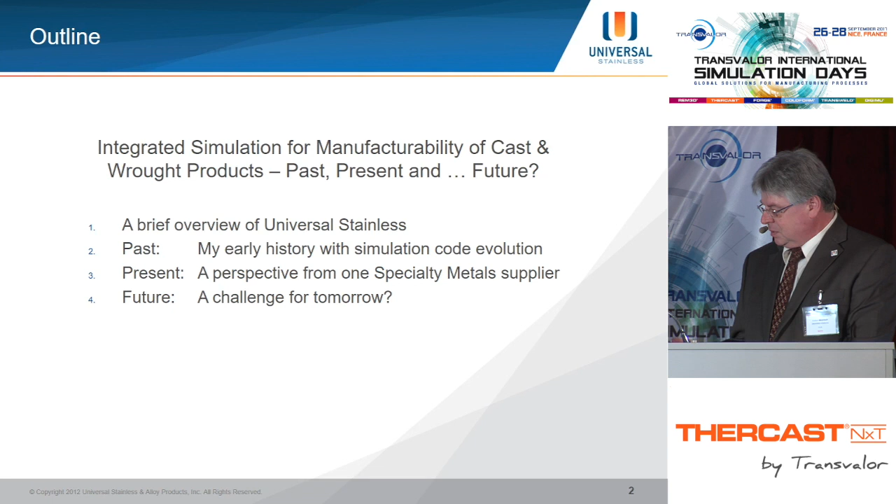So after a brief overview of Universal Stainless, I'd like to give a fairly personal view of the past, present, and possible future of integrated simulation for cast and wrought products. Universal Stainless is based in the northeast of the USA. It's headquartered in Bridgeville, which is just south of Pittsburgh. We have plants in New York, Pennsylvania, and Ohio.

Our main market is aerospace, but we also have other major markets where materials are critical. And in the bottom, you can see the range of the products we make. Largely semi-finished or finished products, ranging from ingot all the way through to bar, billet, wire, and shape products.

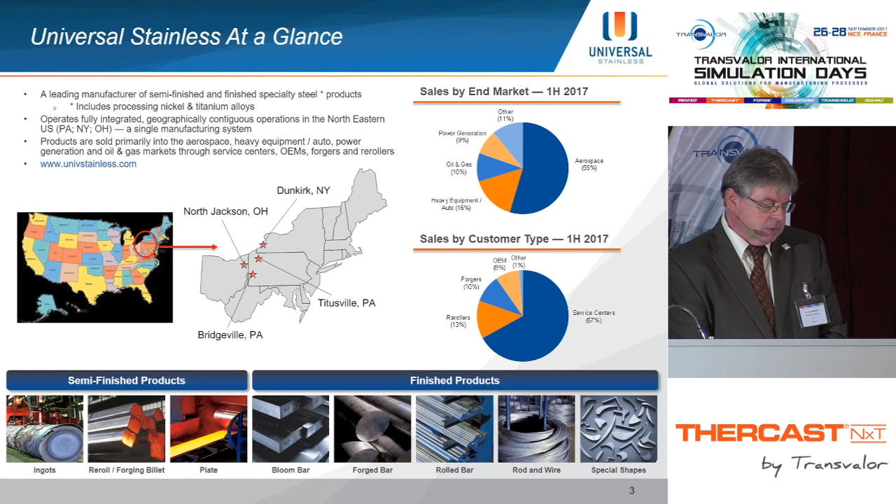Looking at the processes, we have a range of melting activities from AOD, argon oxygen decarburization, 50-ton melts, through to 12-ton vacuum induction melts. Much of our material is then remelted through a vacuum arc remelt process or electroslag remelt process. And then we have a variety of hot working options. Our Ohio plant has the first radial forge in America. It's a brand new facility, 2011, with state-of-the-art equipment.

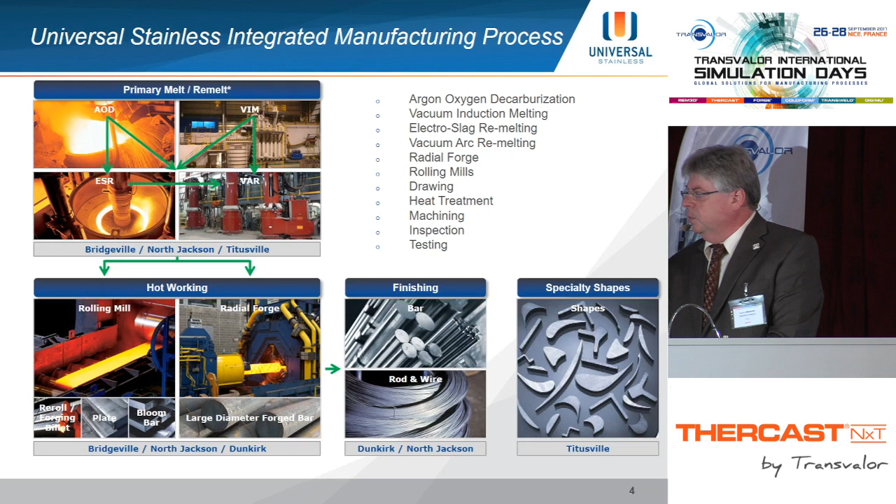So looking at the past of my modeling experience, it goes back to even before Forge 2, when our company at that point had an R&D group in the States, in Houston, which carried out simulations with a code known as ALPID. This is a precursor code to what is now known as Deform, so a pre-commercial version of it. And my company was involved in a collaboration to develop that. Moved on to purchasing Forge 2 and working very closely with Transvalor.

Then I changed companies and moved to the States in 2001, where we started looking at codes for ring rolling development. And at that point, there was a manufacturing technology program sponsored by the US government, which was a 2.5D non-thermally coupled approach. And that was created that way because of perceived constraints on the capabilities of code and what could be developed. That funding was lost in 9/11. And I started working with Transvalor again, and we developed a very successful implementation, I think the first industrial ring rolling code in the world.

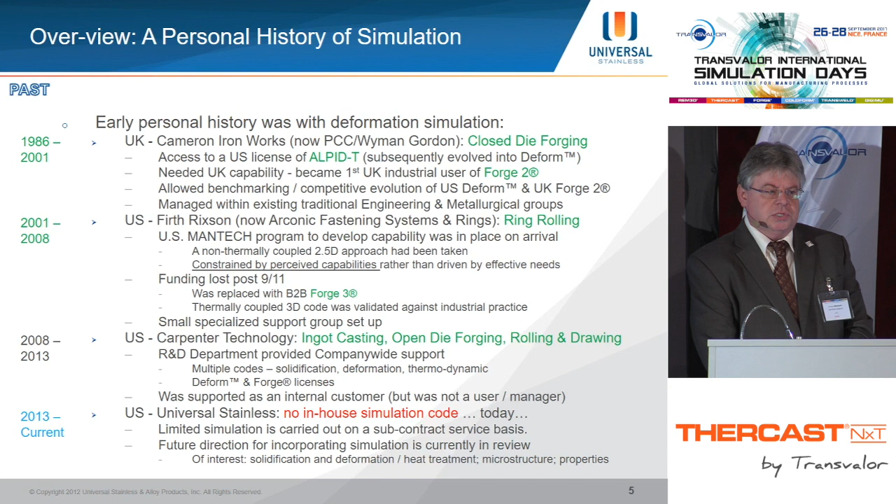2008, I moved on to another company which already had a variety of codes, both Forge 3, Forge 2, Deform. So a lot of code availability, including melting codes, which was my first introduction to them. So in 2013, I moved to Universal Stainless, and we have nothing. But I'm there to help grow this company, and I'm aware of the importance of modeling. And what I'm looking at is developing a strategy for implementing an integrated process chain for all our products and for all our processes.

A very quick focus on the very early days of modeling back in the late 80s. So ALPID I've already mentioned we were using. Those simulations would take weeks, and to get a design iteration would take months. So very, very unique activities were used there, very painful. Very specialized expertise in those days. There was no automatic remeshing, so the whole skill base was quite different.

State of the art back in the late 80s was physical simulation, plasticine. It was quick, metallurgists could use it, we could make dies and modifications very easily. So when I was given modeling as a project in my first job, I basically stood up and said, that's not the future of where modeling needs to be, it needs to be digital. And it's very expensive and it's very slow, but it will improve.

The other big change I made was for a European company, but really a US company in Europe, in Scotland, was not to take the American solution. And the reason I did that was because of adaptive remeshing, which had been implemented. So that was an innovative game changer. And the ALPID development was saying it cannot be done. I said it can be done, it's happening in Europe. So we did that approach.

And the point I'd like to make here is in a few years, we transformed design of forging manufacture. And the big thing was the increase in computational speed, partly from the adaptive remeshing, also improvements in efficiencies and improvements in the computational power.

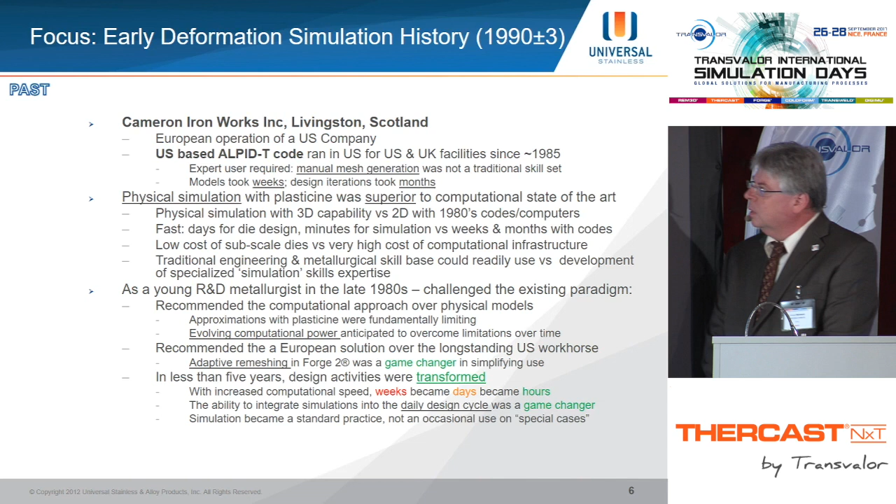Staying on the present, I could argue that engineering materials is very easy. We've been doing it for a long time. I can argue that we can do process development very easily. And a lot of tools are being developed to do both of these things. It's very exciting things for materials design happening just now from ICME.

But I argue that effectively simulating manufacturing processes is really difficult. Too many boundary conditions, too many assumptions, too many unknowns. And as we've heard already this week, computational power remains an issue. So we make approximations.

A perspective I'd like to emphasize here is we can design all we want for good materials, but it's when a material fails that's important. And if we're not designing for the failure mode, for the defects, we're not doing ourselves a service for this industry. So an example of that would be a coarse grain, excuse me.

Coarse grain and a fine grain matrix, or particles in a matrix. They come from the melting process. They come from solid state reactions after the melting process. So what happens upstream in the process is extremely important for the failure mode downstream.

And I think to model that, to simulate that, we have to do the individual process, but we have to do the process chains from beginning to end, because the output of one process is the input to the next. Otherwise, we're back to making assumptions and approximations.

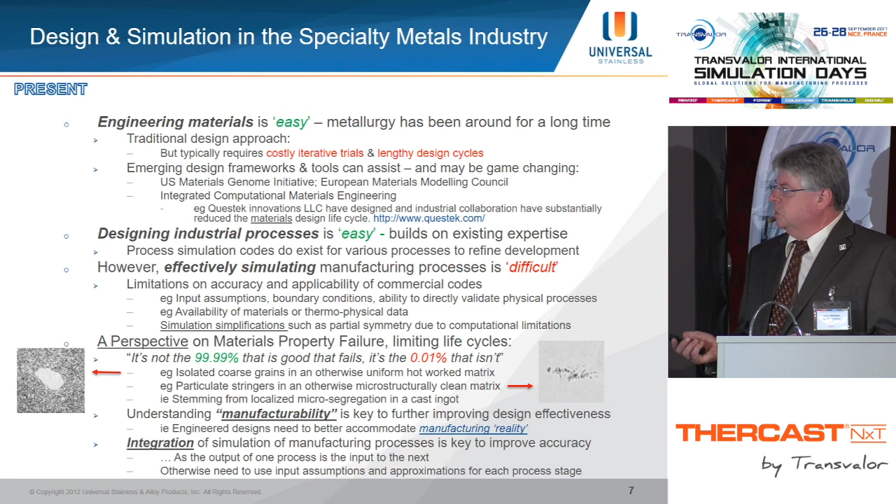So with regard to where we are, I'm doing a technology landscape for my company as to where we want to go, and looking at what's available. And for solidification modeling, there's some very stable codes out there, very mature. But for remelting, for vacuum arc remelting, electroslag remelting, it's very immature. There's not much out there. And it's essentially almost all 2D, and certainly the commercial solutions appear to be 2D. A lot of approximations come along with that.

Thermal homogenization is very important as an industrial step, where we reduce the microsegregation from a cast ingot prior to hot working it. And I think that tends not to be looked at in terms of a modeling technique. I think the tools are available, but not many people are necessarily doing it. And then obviously hot working heat treatment is extremely mature over the years.

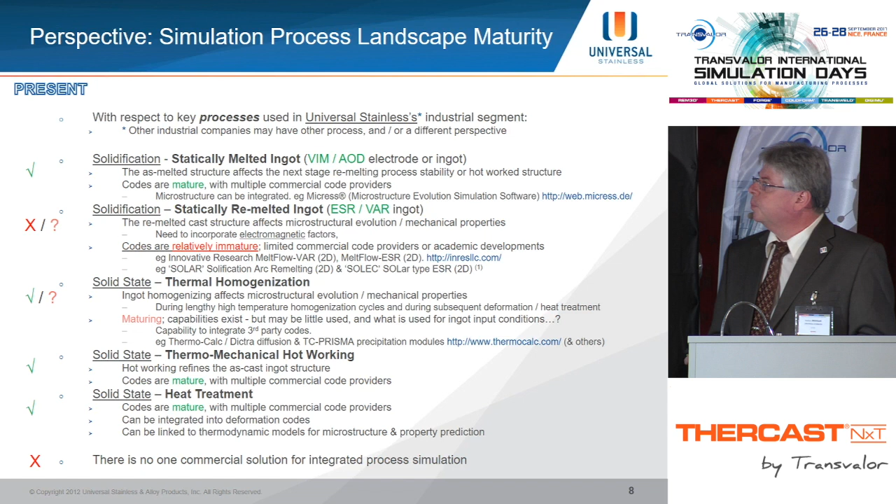So focusing on remelting and remelting simulations, 2D commercial solutions are available, but they're extremely limited, I would suggest. They don't mimic the real nature of the environment, which is a very, very aggressive dynamic environment, melting metal.

So the challenges for 3D is understanding what's going on in that dynamic environment, and also computational limitations. 3D is a problem for many of us. Any solution has to look at the transient states at the beginning and end of the process, as well as the steady states in the middle.

So there have been a lot of progressive developments over the years. As you've seen from my career, I've been in and out of modeling in various areas, but not really looking at remelting for some time. But I'm beginning to look at that again. And it's encouraging to see that there's been ongoing development.

So if we don't know what's happening, we don't know what's happening on the local solidification that gives the local microstructure that ultimately gives us the final properties that we're looking for and the defects. So by being able to measure something, we can then analyze it, we can then improve it. And I think that technology will help us understand how to develop and correlate and validate remelting codes. So this I see as a game-changing technology, which is just emerging.

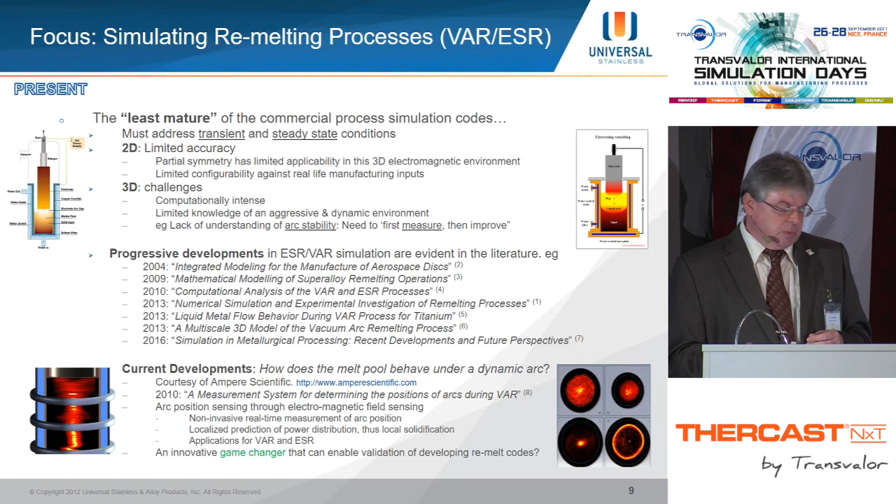Very briefly, does anyone apart from myself really care about remelting? It's encouraging to hear some focus on it in the presentations this week. But 20% of the specialty steel market by dollar value is in remelted products. The work that's been done over the years, and I did some early work in the late 90s trying to integrate across the supply chain, shows there's a level of importance. So this is important to the industry. We don't have it because it's a difficult challenge.

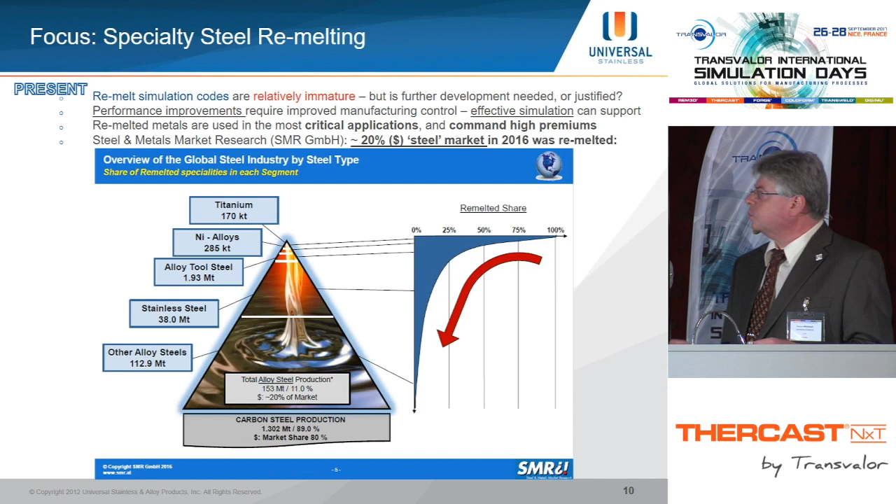So looking at the integration factor, it's very inefficient for industry to have multiple codes, multiple potential hardware solutions, multiple licenses, multiple training programs. What we'd really like is one solution. And I think I've mentioned that remelting is a major weakness here from a process itself. But in terms of integration, getting data transfer between multiple codes, I think there are losses of efficiency. And moving from 2D to 3D to 2D brings a lot of inefficiency. So it's not really what industry is looking for.

And if we want to get to the level of fidelity that will give us defect prediction, we've got to go beyond that. It is encouraging that there's a number of activities where completely independent code providers are providing some level of integration. And looking at what's happening with JMatPro and Transvalor and other codes, there's a lot of integration going on. So I think things are coming to a point where we can contemplate getting a single solution if we have one company which can develop for all the processes. But today that does not exist.

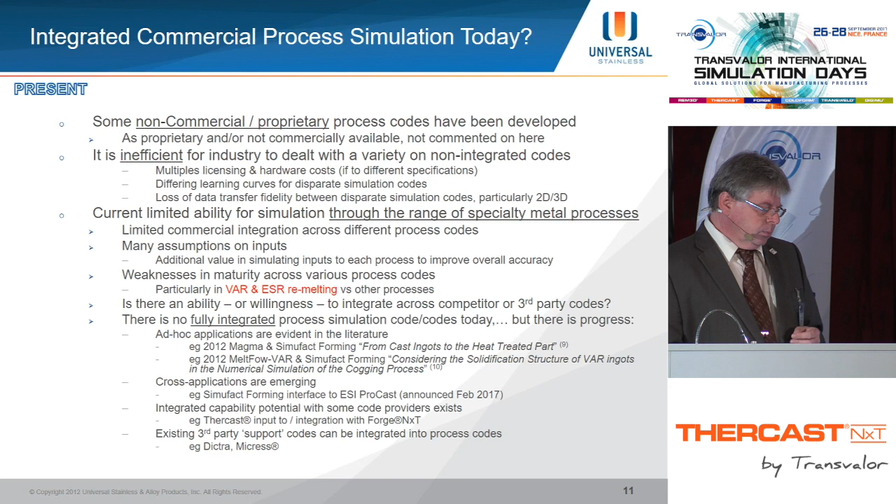So for the future, computational issues, we've heard them in the presentations yesterday, we all face them. For me, they lead to a lot of approximations that just limit the value of a simulation. They're also very expensive. And there's approaches that can be used with academia, there's approaches that can be used with industry, and industry typically is not going to have the very expensive approaches for hardware. So supercomputers, to use that term, may be put into national labs and maybe put into large universities, but it's very unlikely that industry will have access to that sort of technology, at least for the foreseeable future.

So I wonder whether advances in computing that we really have no background in will come, such as quantum computing. Is that really a game changer, or is it irrelevant to us? But we should be looking at whether that is something to plan into our design cycles going forward. CPU evolution will be changing as we move away from silicon architectures. For the shorter term, perhaps cloud-based solutions are useful for industry, where large computations can be done off-site.

I think an interesting direction is open source. There's some literature out there showing that computational efficiencies can be made with a different code approach. So it's nothing I'm particularly involved in, but I can see the evidence in the literature. So I think we need to keep an open eye in terms of what approaches can be taken to improve the computational limitations to make useful codes for industry. And that perhaps takes us to simulation service providers, because industry may have a useful set of tools and techniques for certain applications, but for a fully integrated supply chain, which is 3D, it may need to come outside of that, back to the cloud solution.

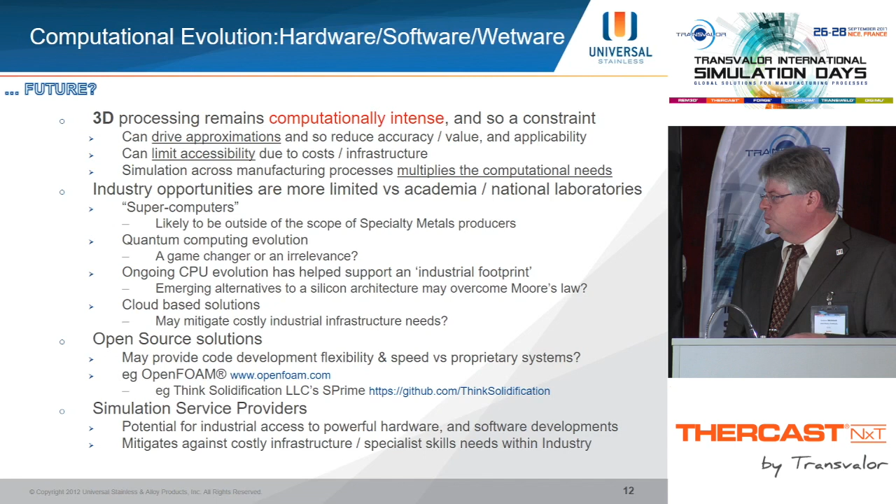So, going over again, there are very, very large challenges in the industry to get what we need today. We've been working at it quite a long time, sometimes in close collaboration with the code writers, and I think that's very, very important. We've had some discussions this week about validation. That should start at the beginning of the code development, not afterwards, and go through a redesign loop. So collaborations with industry, academia, labs, code providers are all very useful.

There's limited integration across process codes today. Again, it's encouraging to see more and more happening. But what industry I think would love to have is one provider. And Transvalor, I can argue, is the most likely solution for that with the suite of codes it has today. If that doesn't happen, there will be individual code providers emerging, and they are emerging, leading to a more inefficient implementation of what we really want to do. And inefficiency is not only expensive, it leads to inaccuracies.

I think incorporation, identification of game-changing innovations is important. It's very easy within any organization to look at what can be developed in-house. Transvalor has an excellent reputation, and I would argue the best in the world for working with other partners. But perhaps with a European focus, so make sure there's a look at what's happening elsewhere around the world. This is an international simulation days, so you have an international perspective. But keep an eye on game-changing innovations that can be used to help develop codes more effectively, more quickly.

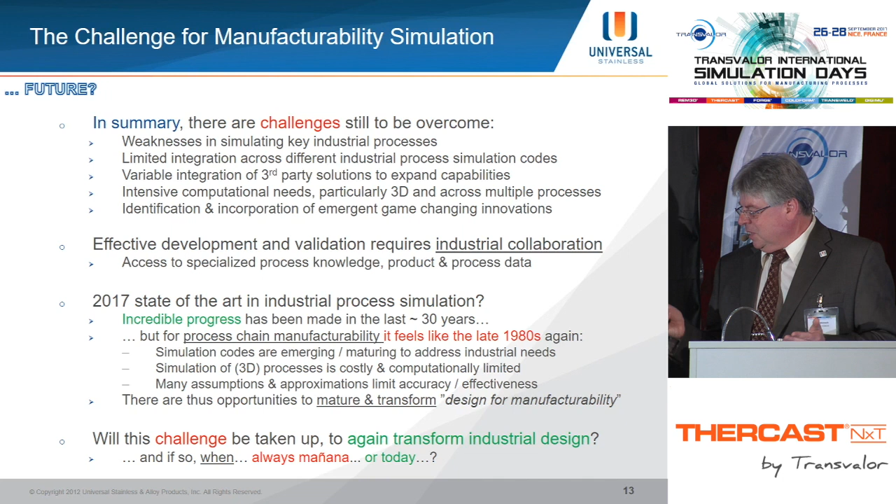And I can stand here as a representative of Universal Stainless and say, we're trying to move into that area. We don't have a lot of background, but we have a lot of skills and equipment. And so we're interested in working on collaborations and code development. I know it doesn't happen tomorrow, but if we don't start, then it's not going to happen. So that's really all I was interested in getting across to you. If there's any questions, I'll be pleased to take them.

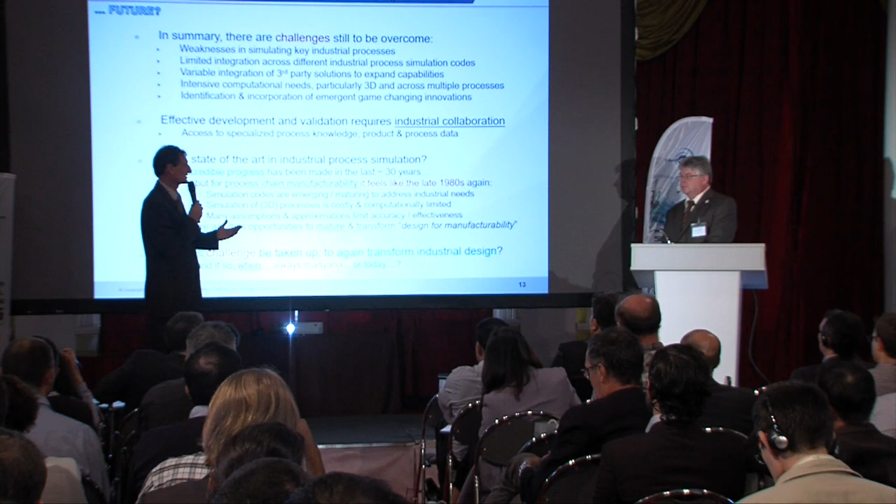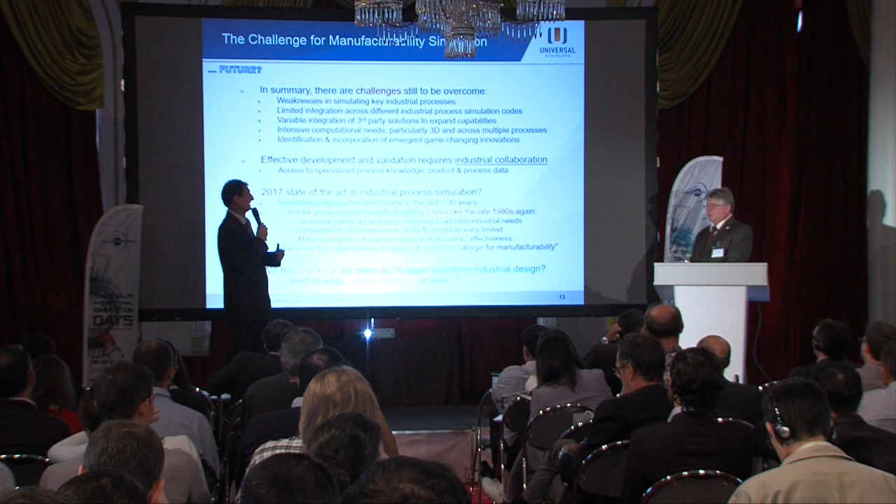I will make some comments because we need to react a little bit after that. What I like first of all is this idea of game changer. I think that we in Transvalor try every time to be on that side. You mentioned remelting. We could also have made some comments when we moved to parallel computing, when we introduced optimization and so on. What's going to be our next development which could be seen as a game changer? Maybe, as you mentioned, the VAR and ESR. This is something that we have been working on, and hopefully we will manage to provide something which is matching the industrial expectation.

The other point that I'd like, and this is where I believe we do have some strength, is in terms of interoperability between the software. You're saying that you're looking for something like a global solution. Do you believe that what we can do on the casting side with Thercast and what we're doing on the forging side with Forge is a good strength, important for a company like you guys? I think it's very important.

The weakness, like I say, is the black hole of not having a remelt. Because the remelted product is a more critical material. It's a higher margin material, so it's going to drive the value more. So what's happening in Thercast and Forge is setting the scene for what needs to be done. It's got its own applications for sure. But in terms of the valuable materials, it's missing a whole segment there. And there's uniqueness on the remelting side. It's why it doesn't exist today, or doesn't exist well today. So I think that slot needs to be filled, and then there's a complete chain. And at that point, as we say in the States, it's a slam dunk. That's what we're looking for.